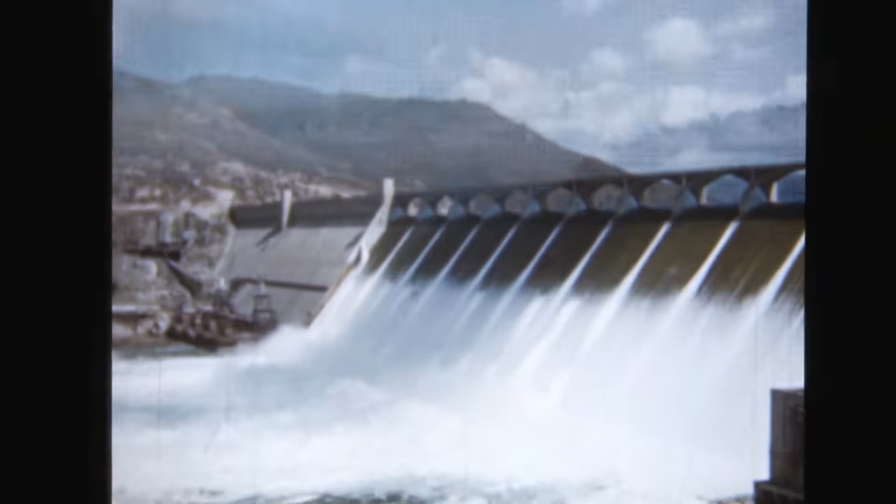The people of the beautiful and economically important San Juan Islands were promised power a long time ago. To serve these islands, it was necessary to find a way to transmit power from the great federal projects on the Columbia River over hundreds of miles of high-voltage lines.

Several alternate plans of service were investigated, including a submarine cable from the mainland to Orcas Island on the north, then overhead lines spanning the narrow reaches of water from island to island, using high precipitous banks to obtain sufficient clearance for the long spans required.

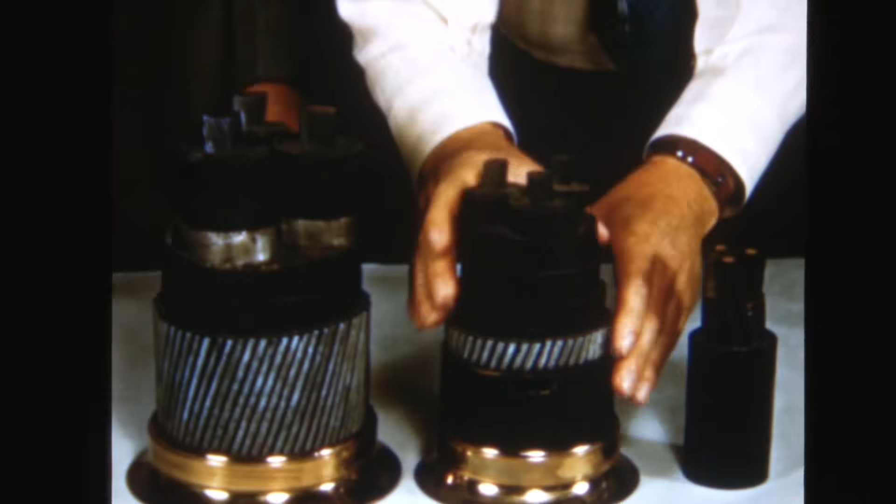The plan finally selected included a 4.5-mile submarine crossing of Rosario Strait, a wood pole line on Decatur Island, and another 2-mile submarine cable to Lopez Island. The core of the entire plan was the submarine cable. To select the proper cable, Bonneville engineers investigated several different types of design.

Final specifications called for a submarine cable covered for mechanical protection by galvanized steel armor wires laid in a jute bedding around the 3 rubber-insulated copper conductors. Each conductor was wrapped with a Monel metal shielding tape and a little over 1/2-inch wall of rubber insulation. The cable was manufactured in one continuous 7.5-mile length, weighing nearly 750,000 pounds.

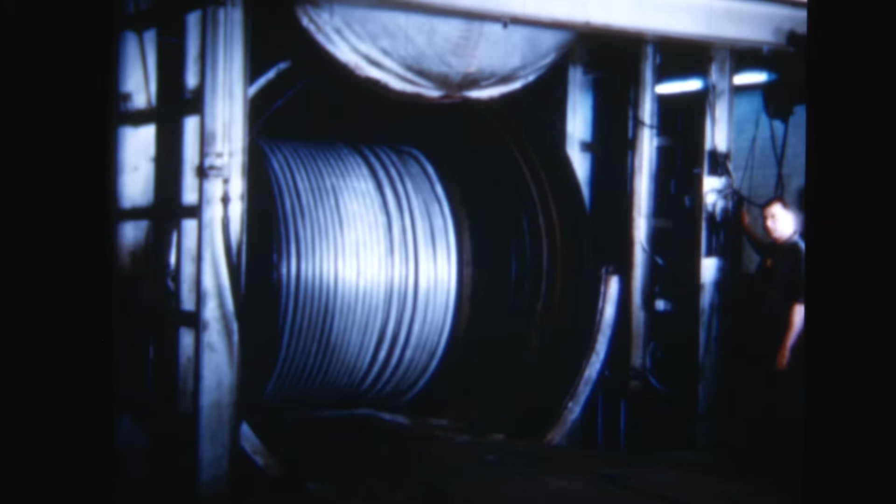The first step in manufacturing the cable was to strand the 61 individual lead-coated copper wires into phase conductors. Next, these were insulated by folding rubber compound strips around each conductor and compressing them by forming wheels. After 8 separate layers were built up, a temporary lead sheath was put over the outside to serve as a mold. The cable was then placed in a large vulcanizing tank in which it was cured under pressure and heat for several hours.

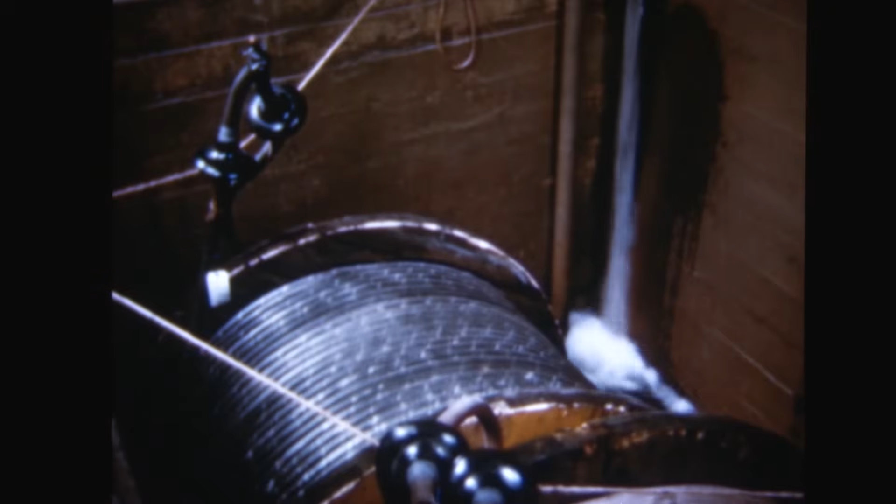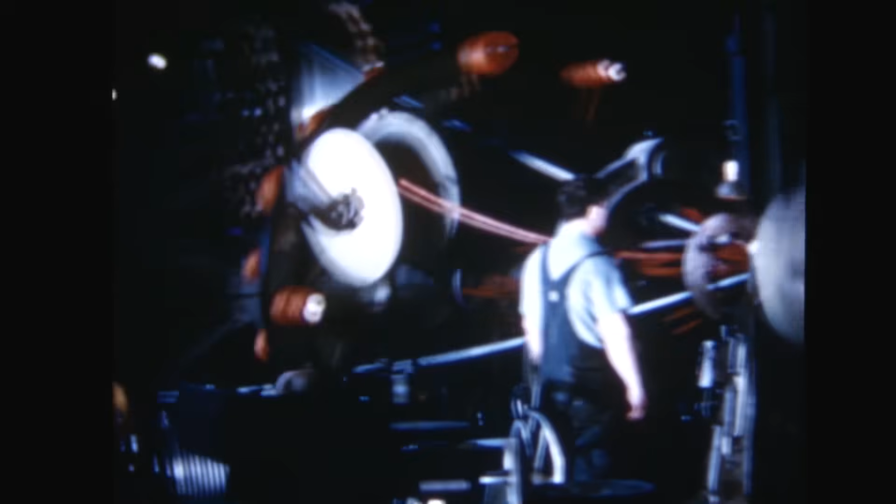After the curing process had been completed, the temporary lead sheath was peeled off like a banana skin. The conductor was then immersed in water for 12 hours and tested with 170,000 volts DC for 15 minutes and 49,000 volts AC for 5 minutes to ensure that the insulation had been properly applied and cured. 3 of these individual Monel-taped conductors were then twisted together with jute fillers to make a firm, rounded core. This assembly was wrapped with a heavy tape binder and placed on reels in 2,300-foot lengths.

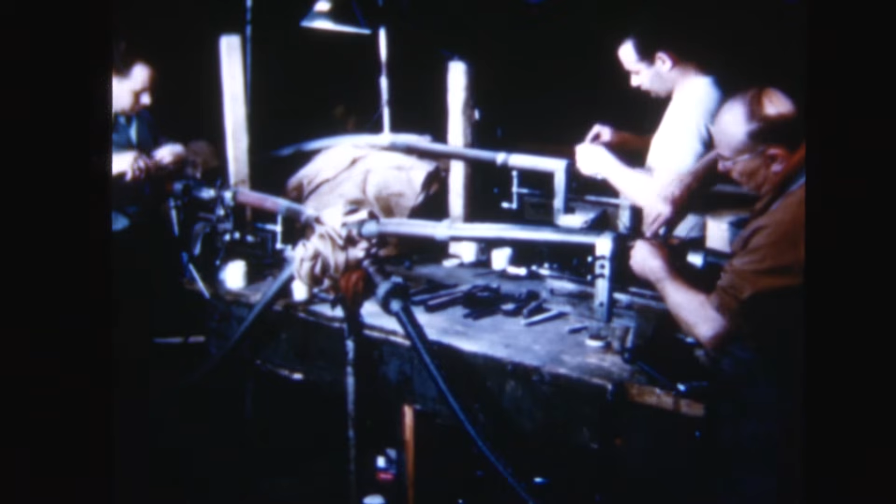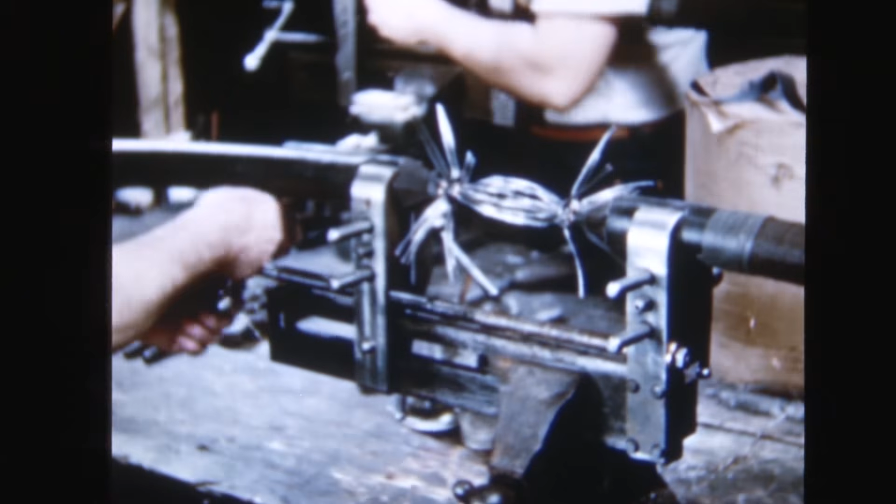Factory splices were required to join the 2,300-foot cable lengths. The 61 copper wires in each conductor were separated and silver soldered. When the birdcage of wires had been individually soldered, the strands were compressed back into a smooth, firm assembly, very little larger than the original conductors. The individual conductors were then re-insulated with rubber tape. An electric heating strip was wound around the joint and an asbestos blanket wrapped over it to vulcanize the rubber tape. These splices were tested with the same AC and DC voltages as the original insulation.

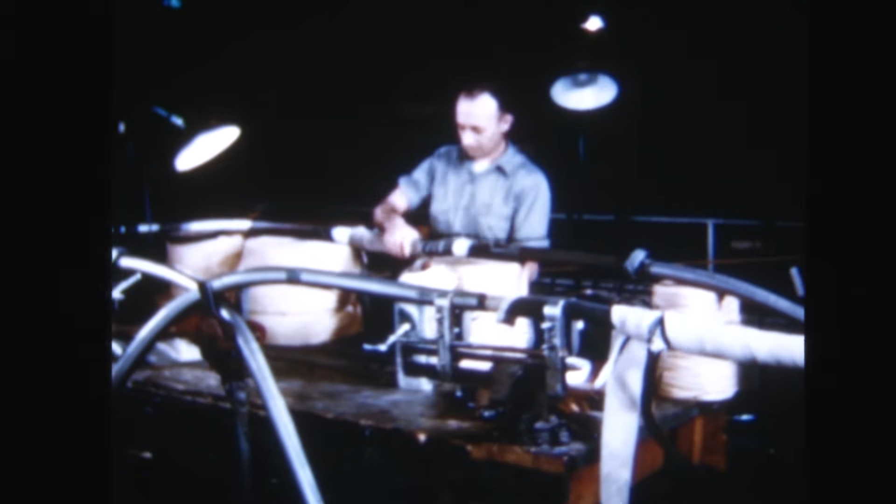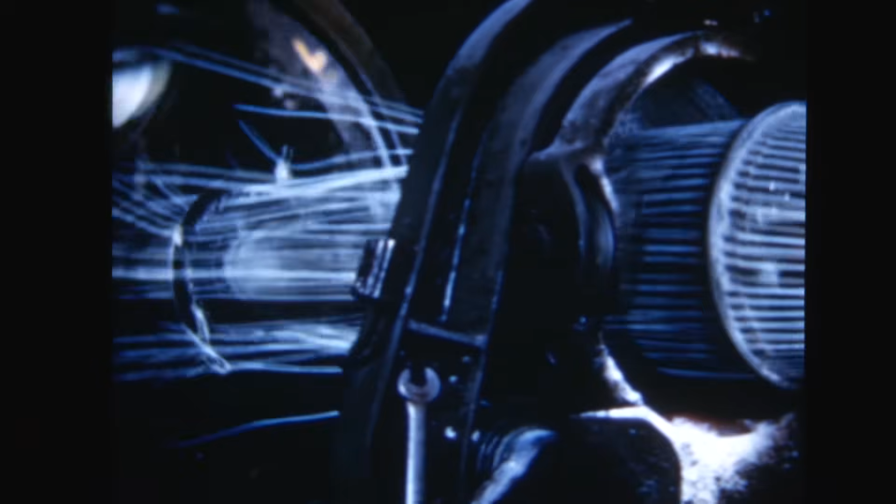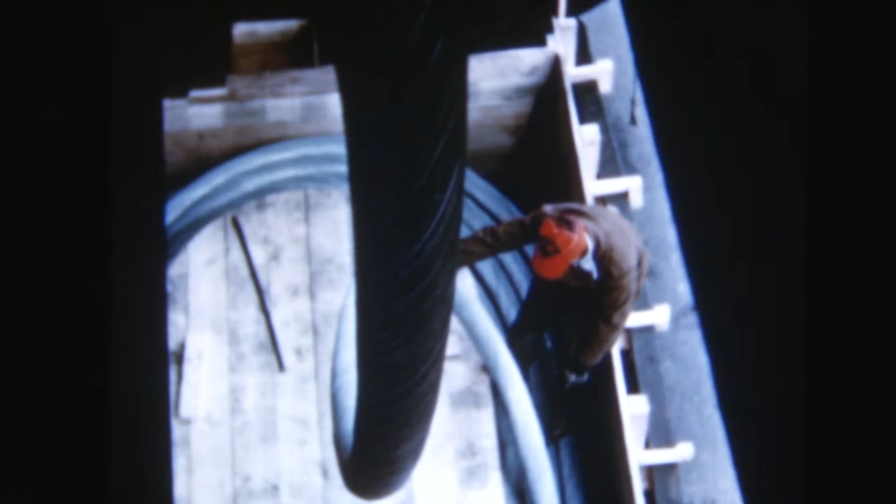The core was covered with a cushion of jute, then wound in one continuous operation with 400 miles of 1/4-inch galvanized steel armor wire. From the armoring machine, the completed cable was fed directly over a capstan 40 feet above the ground into the gondola cars, where it was coiled about a wooden core in the center.

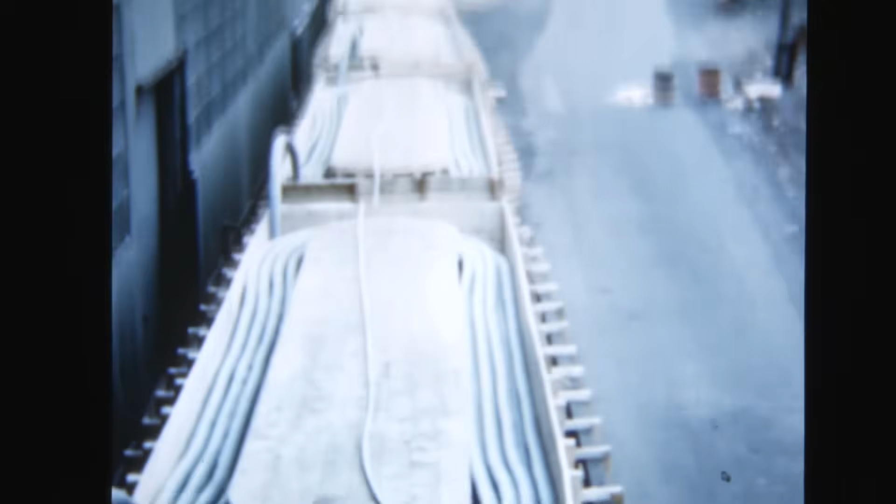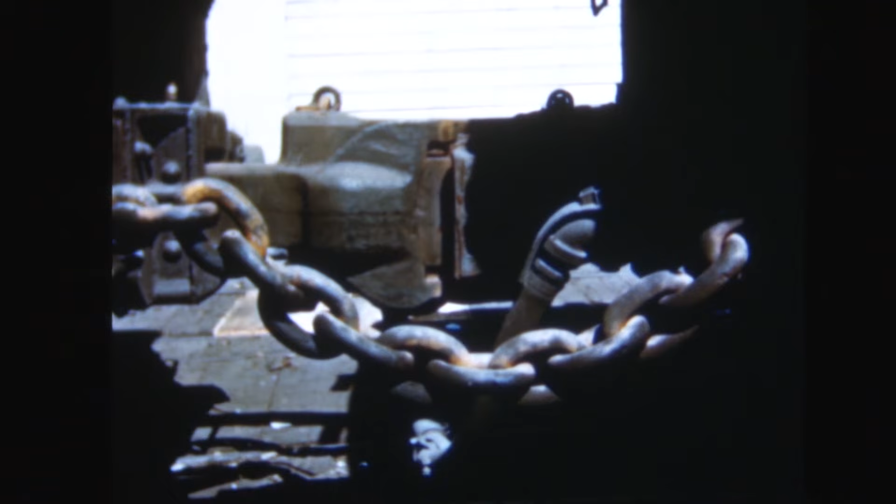The cable was carried from one car to the next by means of vertical loops, and the cars were sealed with lumber. As a safety precaution, the gondola cars were linked with two heavy chains and a bar welded through the coupling pin to prevent accidental opening of the coupling in the freight yards or during transit.

After a final test, the shipment was appropriately launched by breaking a bottle of Atlantic Ocean water on the end car and started on its 3,000-mile trip to the West Coast. In the meantime, Bonneville engineers were completing plans for installation of the cable.

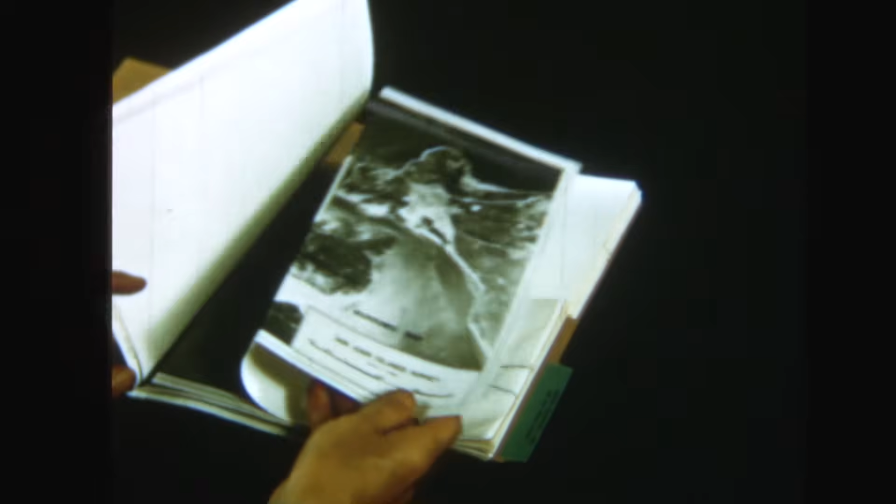Studies of weather records for the spring period of the previous 6 years were made to determine probability of favorable weather. This record had to be matched with tidal information, since the velocity of the water in the channel would be one of the major factors during the cable laying operation.

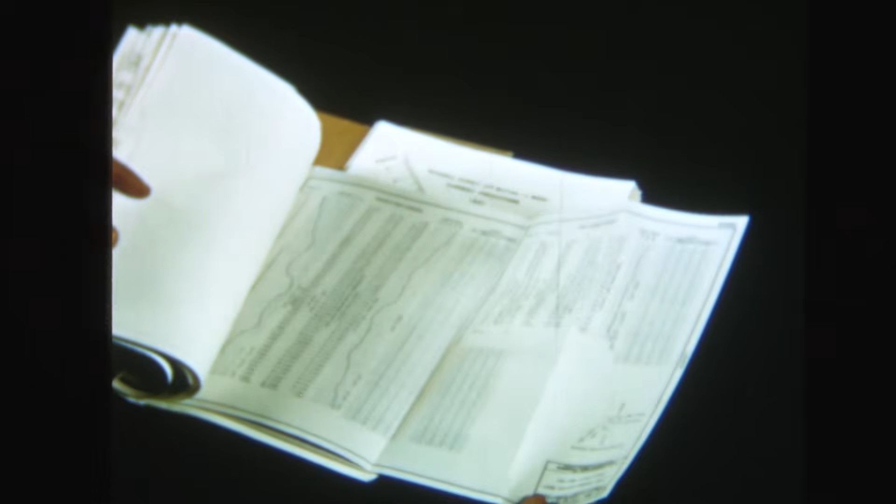To assist the Bonneville Power Administration in this problem, a special study was prepared by the Coast and Geodetic Survey, predicting the actual velocity of the water in Rosario Strait for each hour of the day from April 1st to June 1st, 1951. From this prediction and the weather studies, the dates of April 16th to 18th were selected. On these dates, the tidal currents would be near zero for several hours in the late morning and early afternoon.

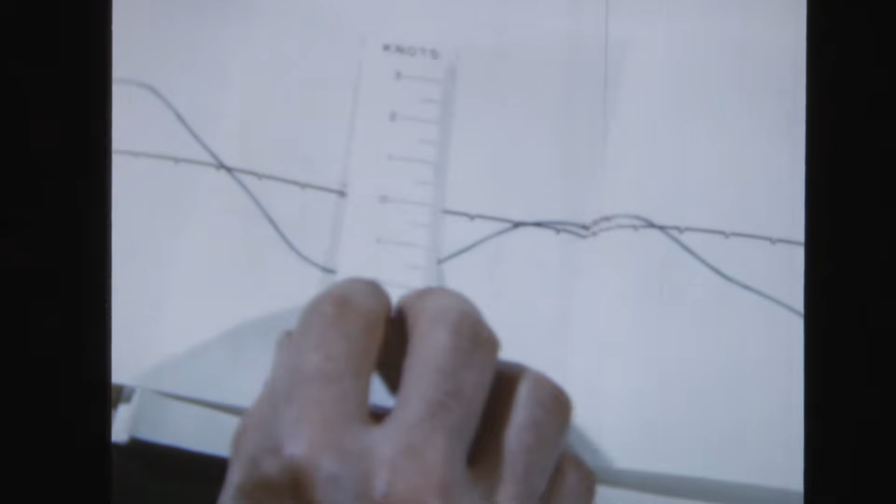The main hazard in cable laying is paying out the cable faster than the ship moves. Unless this is prevented, it may result in permitting kinks in the cable as it piles up on the bottom of the sea, as well as the possibility of running out of cable before reaching the opposite terminal.

To control the rate of payout of the cable, an underwater profile was made from fathometer readings taken by the Coast and Geodetic Survey. At each station on this profile, the proper tension was calculated and the angle at which the cable would enter the water.

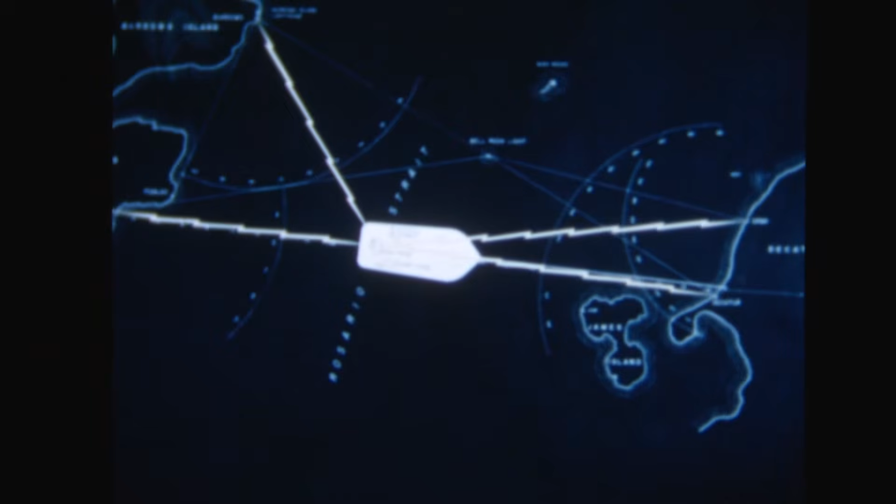To control the movement of the cable ship and obtain an accurate record of its position at all times, survey parties were to be established on shore at each end of the course and at locations off to the side. 4 such points were selected for the Rosario crossing. Radio telephone communication was provided from each survey party directly to the top deck of the cable ship. Readings determining the position of the cable ship were to be taken every 2 minutes.

In the meantime, the cable train was completing its transcontinental trip. The manufacturers publicized the huge shipment by signs placed on the sides of the cars. These signs read: Okonite Submarine Power Cable. For 25,000-volt electric transmission. World's largest high-voltage cable.

Diameter, 4 2/3 inches. Weight, 19 pounds per foot. Total weight, nearly 3/4 million pounds. One continuous cable over 7 miles long. For Bonneville Power Administration.

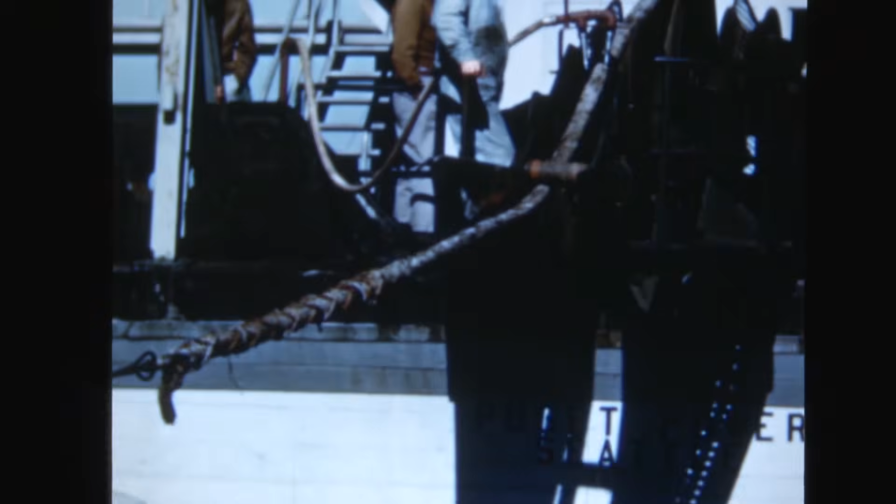The Puget Sound Power and Light Company has installed a number of cables across the deep waters of Puget Sound using a specially equipped cable ship. Bonneville Power Administration was able to charter this ship, named Puget Power, for the cable laying operation.

To test the ship's equipment, check the communication facilities, and assure complete coordination, all shore and ship crews were assembled for a trial run in Seattle's Lake Washington. There, an actual operation of laying and picking up a mile-long piece of used cable was performed. Meanwhile, the 9 gondola cars were being spotted on the dock in Seattle for reloading to the cable ship.

The cable loops between cars had been protected by burlap wrapping, which was pretty well worn by the time it reached Seattle. Before removing the cable from the cars, both ends were opened up and connected for a high-voltage test to ensure that no damage had occurred during transit.

46,000 volts DC were applied to each of the 3 conductors for a 15-minute period. Final test indicated clearly that the cable itself was not injured in transit. By this time, the cable ship had been brought around to the pier from Lake Washington and was spotted at the dock for loading operations.

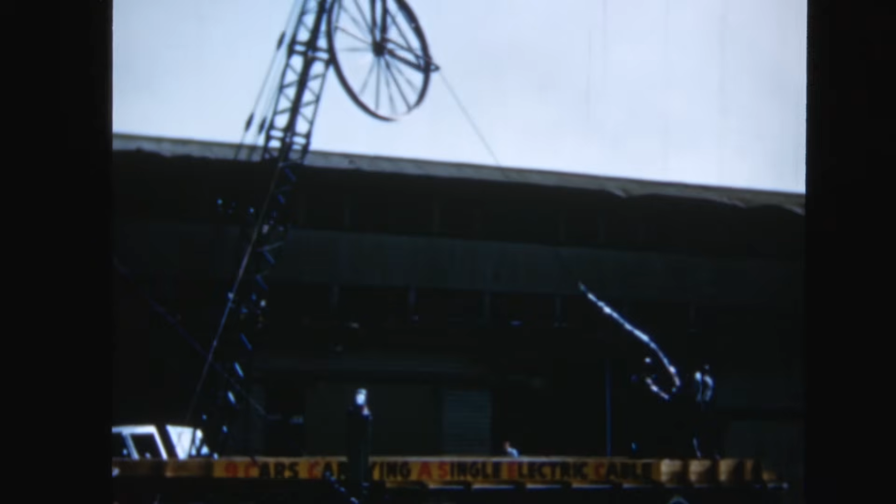A sheave, 8 feet in diameter, was suspended over the gondola cars at approximately the same height as the capstan at the factory. This was necessary to allow the armor wires on the outside of the cable to lay back into place, as it had been during the original manufacturing process. In the cars, this armor wire tended to basket and open up. The end of the cable was threaded through this sheave over the stern of the cable ship.

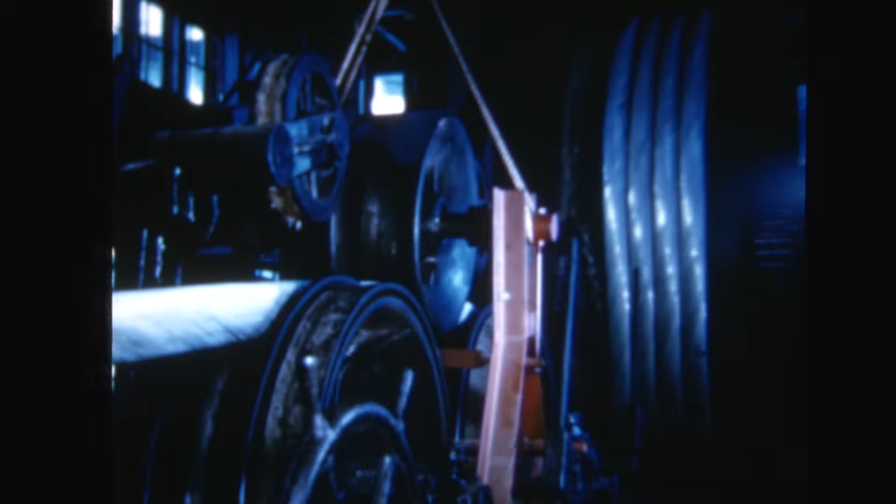Upon entering the ship, the cable was wrapped 4 times around a 92-inch diameter drum. The purpose of this drum was to pull the cable from the cars onto the ship. Later, during the laying operation, this drum would be utilized for providing braking power to hold the cable back in deep waters. Immediately forward of this large drum are 3 small sheaves which drive faster than the drum and thus keep the cable tight to prevent slippage.

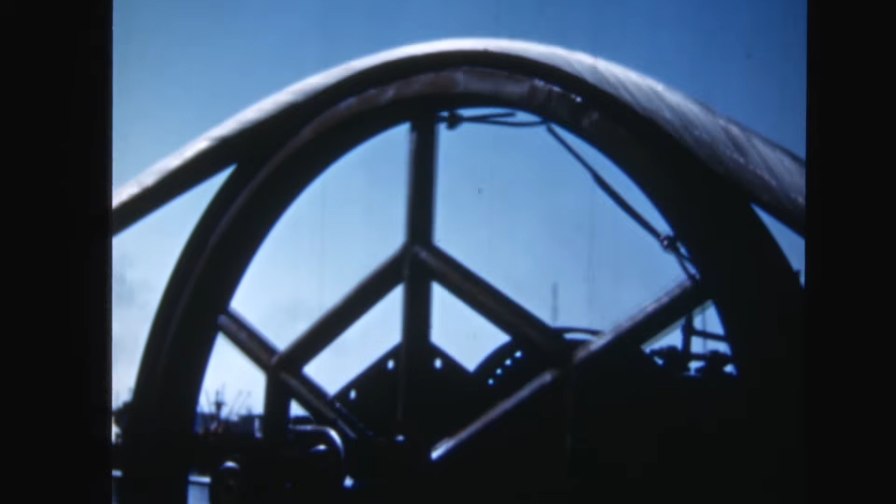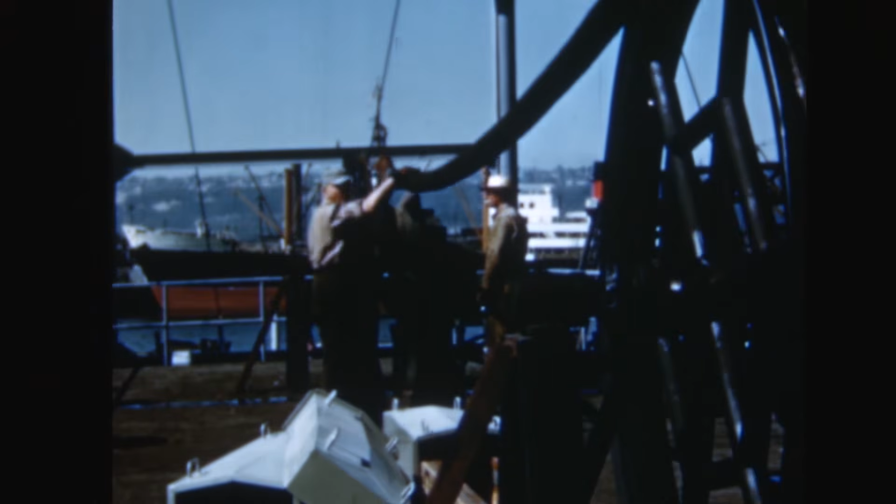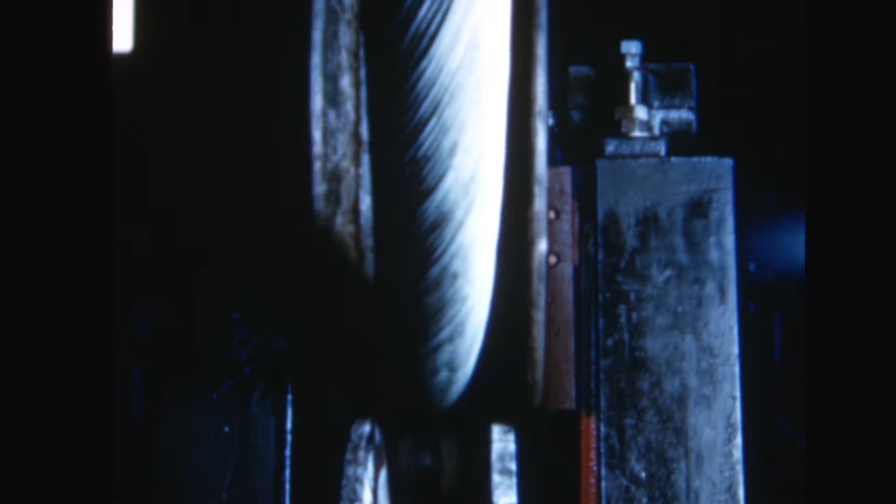2 cable wells were available for storage, one forward and one amidships. It was necessary, with the 7.5-mile length of cable, to store portions in each of the 2 wells. Over each of these wells is located a large sheave driven by steam to pull the cable to the top deck. At all points of sharp angle on the cable, the diameter of the sheaves is quite large to avoid damage due to bending.

In the wells, a large crew of men was necessary to manhandle the cable snugly into 34-foot diameter coils. 5.25 miles of cable were stored in the forward well, which required 17 layers of better than 1,500 feet per layer.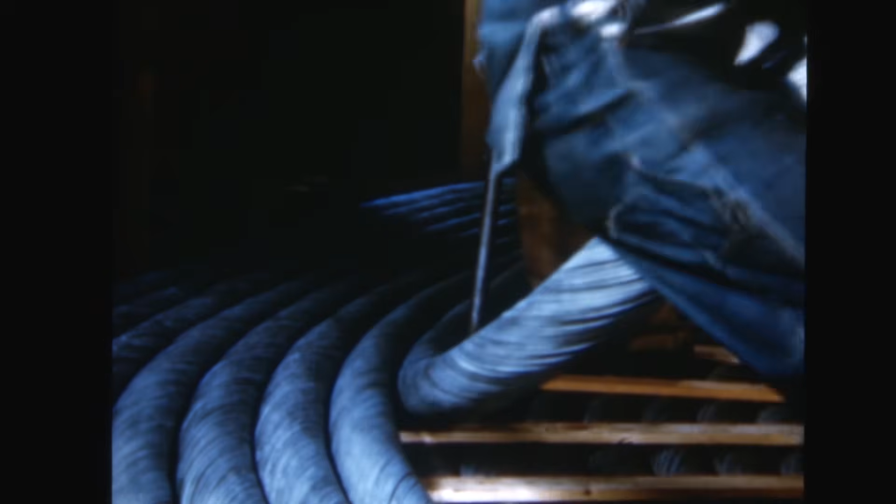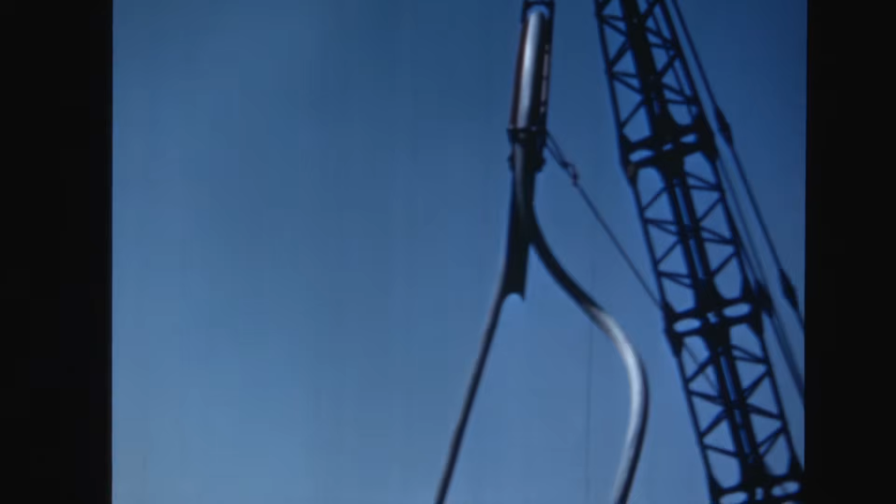Normally, an excess length of cable is ordered for submarine jobs. With 2 separate crossings, it appeared advisable to keep the cable in one continuous length, so that the remaining cable from the shorter crossing would be available for the second, more difficult crossing. This also would allow any leftover cable to be in one piece.

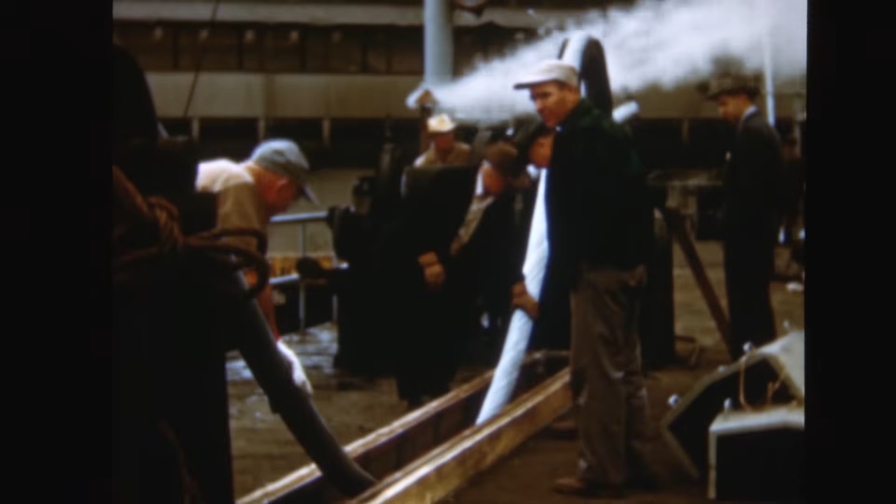A slot was cut in the top deck between the 2 holes. A loop of the cable was lowered through the slot, and the coiling process was repeated in the second cable well, where the remaining 2.25 miles of cable were stored. In this manner, the cable remained in a single continuous length. As each car was unloaded, the railroad switch engine spotted the next one under the large sheave, and the operation was continued without interruption. The complete loading operation was performed in 2 normal working days.

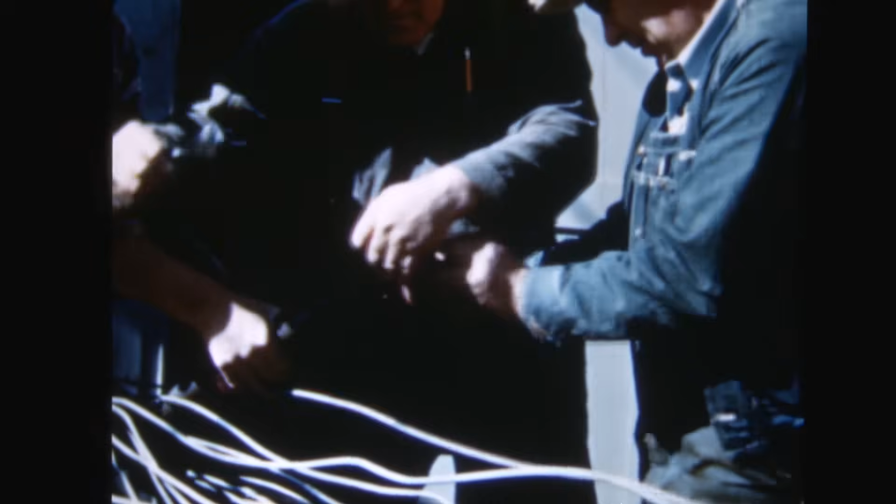The tag end of the cable was opened up, the conductor sealed with rubber tape to keep out the seawater. Then, the armor wires were formed into a pulling eye for use at the start of the laying operations.

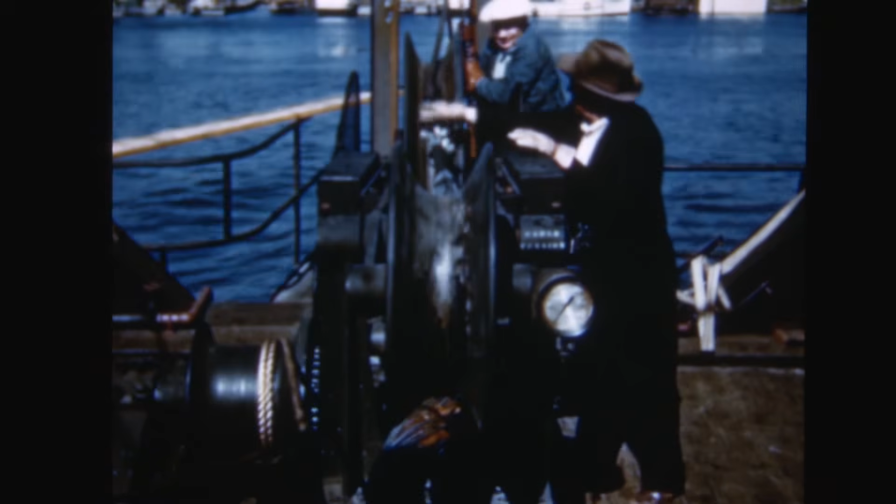Since it would be necessary to know the actual tension on the cable during the laying, a special sheave calibrated against a strong spring was provided at the stern of the boat. The cable was threaded under this sheave to the fantail. As the tension varied, the sheave was raised and lowered against the spring and indicated the tension being applied. Overnight, the cable ship was towed 65 miles from Seattle to Lopez Sound.

Meanwhile, ship and shore crews were assembling at Anacortes and completing final preparations for the laying. Early in the morning of April 16th, survey, radio, and work crews were loaded on small vessels and transported to their stations. The cable ship itself was anchored offshore from the Lopez terminal. Cable laying operation was about to begin. Although this operation would require less than 3 hours, the preparatory work up to this moment took more than a year of planning and preparation.

A helicopter was used to carry a small, light rope from shore to ship. This rope was attached to a steel pulling line, which was then drawn to the ship and fastened to the pulling eye of the submarine cable. A tractor on shore pulled the submarine cable from the ship into the terminal. In this operation, it was necessary to use power from the steam winches to feed the cable off the ship. During this time, the cable ship remained at anchor.

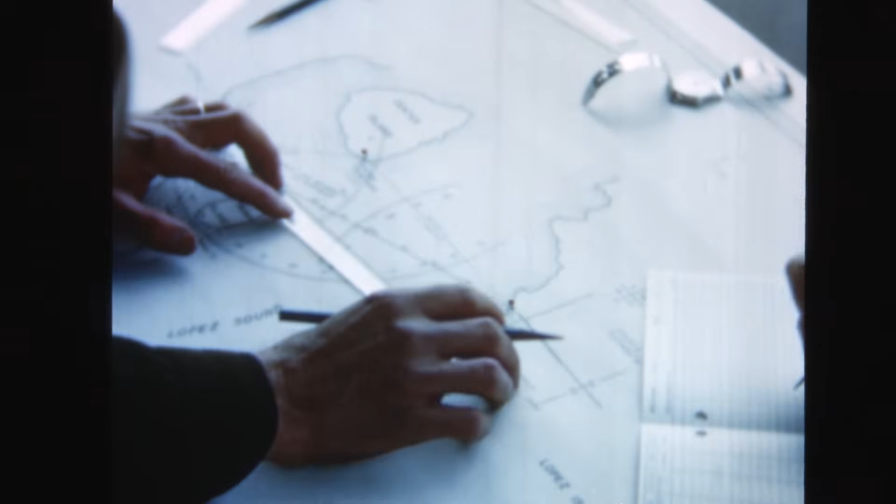The shore crews transmitted their transit readings to the plotting table on the top deck, where the information was laid off on a master control map, and the actual course of the cable ship was thus recorded. The position of the ship with respect to the course was made available to the navigating officer.

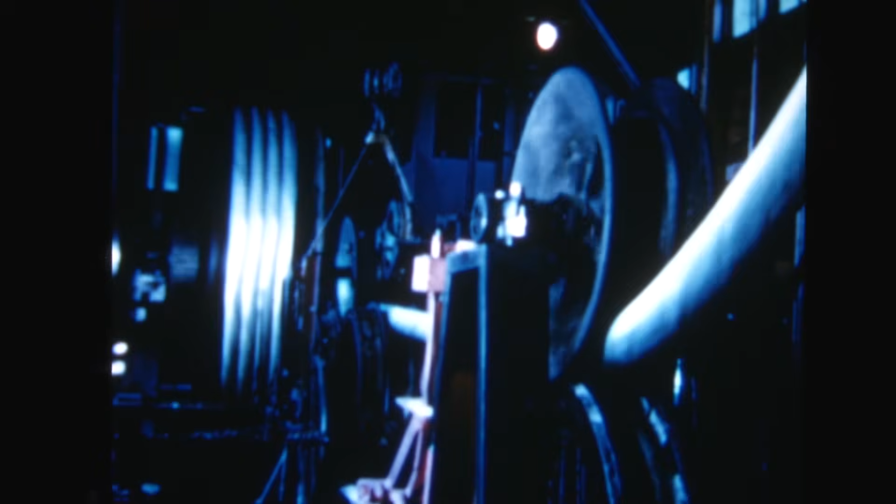A second crew on board ship, in the meantime, was recording the angle of the cable entering the water, the number of revolutions of the main drum, which gave us the actual length of cable paid out to that point, the speed of the revolutions of the main drum, the actual tension of the cable, and the calculated tension desired at each location.

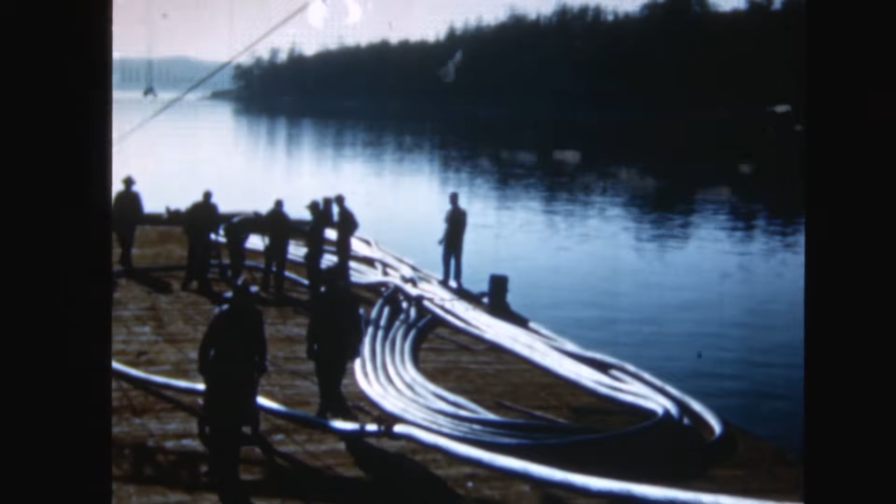It was impractical to bring the large cable ship into the shallow water near shore. So as it approached the Decatur Island terminal, the cable ship was brought to a stop in deep water. There, a scow was placed in position near the stern so that sufficient length of cable could be laid out to reach the shore terminal. With the measured amount of cable on the scow, workmen then bound the armor wire to prevent unraveling and sawed the cable in two.

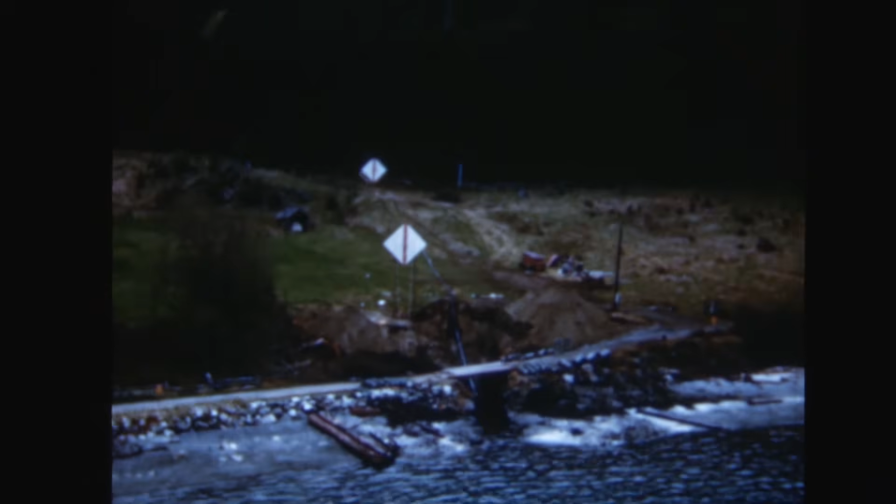Shore crews would be coming the next day to drag the cable up to the terminals from the scow and backfill the ditches. The cable ship was towed around Decatur Island to Anacortes, where it lay overnight. Early in the morning, she was moved to anchorage off the Fidalgo terminal in preparation for the second day's laying across Rosario Strait. Procedure at Fidalgo terminal was similar to that of the preceding day. Submarine cable was pulled ashore by tractor, anchored, and the ship began moving across the strait.

The crossing of this strait, 4.5 miles in length and in much deeper water, was more difficult due to the greater tensions required, a stronger wind, and eddy currents at the center of the channel. Because of these adverse factors, it was necessary to operate the ship at a higher speed, better than 3 miles an hour at times. Deviation from the straight line course was as much as 400 feet, although the total amount of cable used in excess of calculated requirements was only 500 feet.

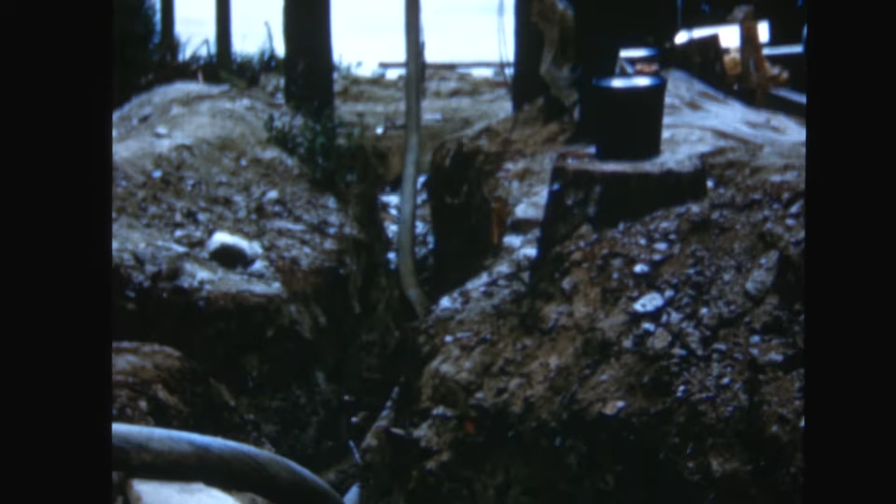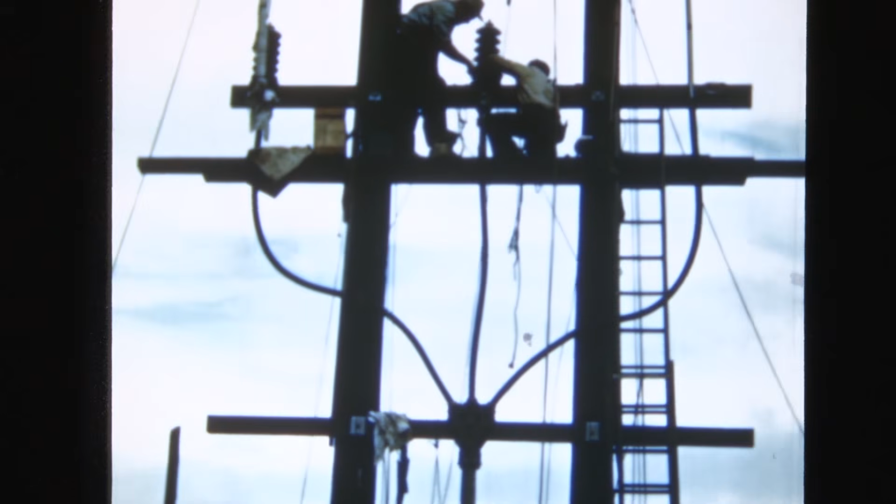After completing the crossing, the cable ship was again anchored, the shore length paid off onto a scow, and the cable pulled ashore to the terminal. At all shore terminal structures, the cable end was split, and each of its conductors was brought out to a separate insulated terminal. On the islands, the terminals were mounted on wood pole structures. At the Fidalgo Island substation, the cable was terminated on a steel frame.

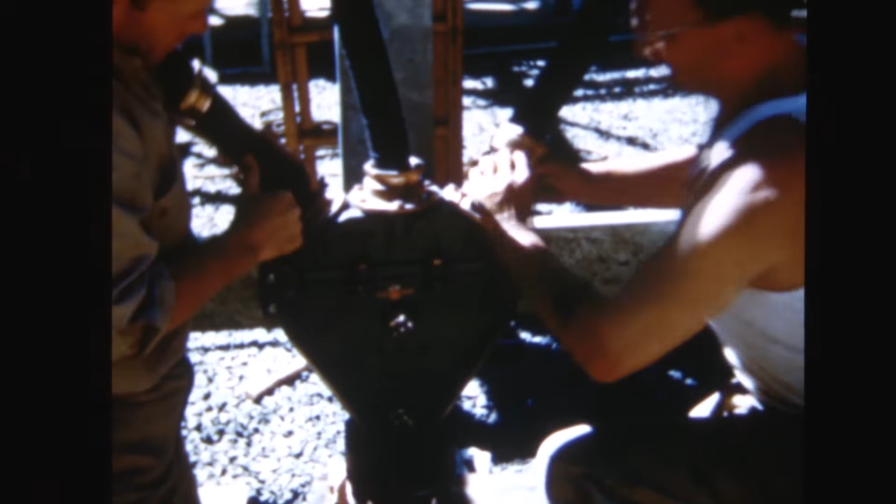The protective armor wire was anchored in a cast iron casing known as a spreader head. The 3 individual conductors were carried through this spreader head up to the pot heads. Shielding tape on the outside of the conductors was protected in this portion by neoprene rubber and fabric tapes. To relieve the electric stresses between the conductor and the ground shielding tape, a tapered stress cone was built up on the end of each conductor.

This stress cone was then inserted through the base of the terminal and a porcelain bushing placed over the upper end. This pothead, as it is called, was later filled with a compound material to keep out moisture and air. A gasketed cap nut was attached to the top of the pothead and provided a terminal for attachment of the overhead lines.

The cable was energized on July 22, 1951. This event was celebrated by the population of the San Juan Islands at a large community gathering with members of Congress, civic leaders, and the Bonneville Power Administration participating. The cable has been in successful operation since that time. And so a promise has been fulfilled. A promise made more than 13 years ago that someday in the future, power from the mighty dams on the Columbia River would be brought to the San Juan Islands to light homes and provide energy for the growing industries of the islands.